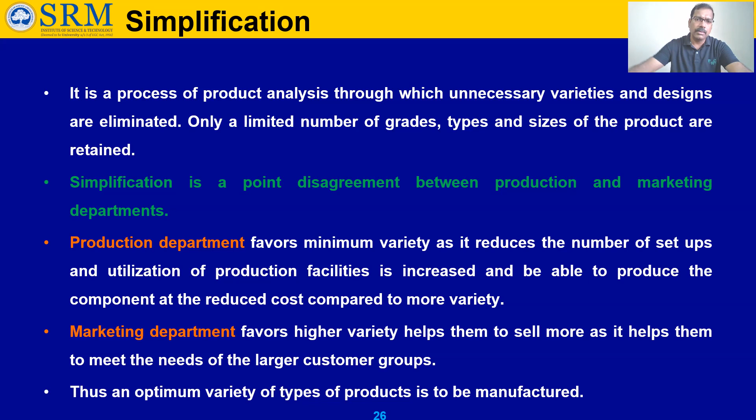The next topic we discussed some advantages of simplification, and what are the disadvantages also there.

Then next topic we discussed about standardization, where we have to standardize what are all the materials we are using, what product we are going to use, what machineries we are going to use, what method we are going to do, what kind of policy or principles we are going to do. We have to standardize to avoid issues in making.

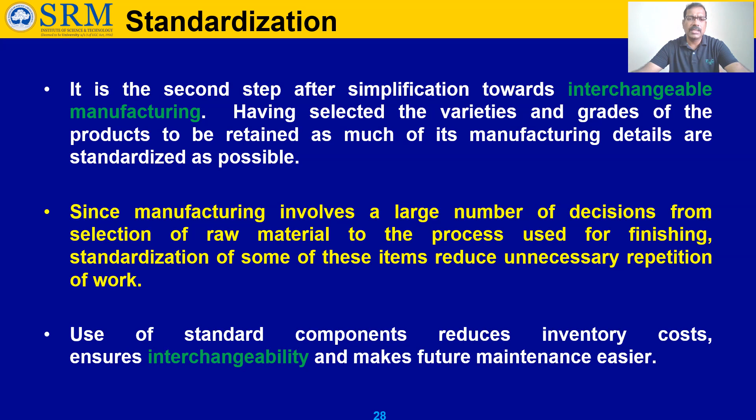Okay, so that is what standardization, where we discussed the interchangeability concept. So what is meant by interchangeability is, if one particular product is being manufactured by multiple operators, by various machines in various locations, all the components should have a desired quality, right?

If it is not in the expected quality, we can't utilize it. Everything cannot be assembled or manufactured at one single place by a single person or single machine, right? So once the number of components getting increased, demand increases, we have to distribute the components to be manufactured through multiple people, multiple places, multiple machines. In the sense, everything should be in desired quality.

For example, somebody, worker number Y, is making one component in one industry, which is going to be assembled with another worker who made component Z in a different location, both should be assembled. If it is not possible to assemble, there is an error in assembly, or if it's not good, then there is a problem, right?

So for that, standardization is important. We have to make that. So attaining is not easy. We have to plan properly so that they can be able to attain it. That is the concept of interchangeability.

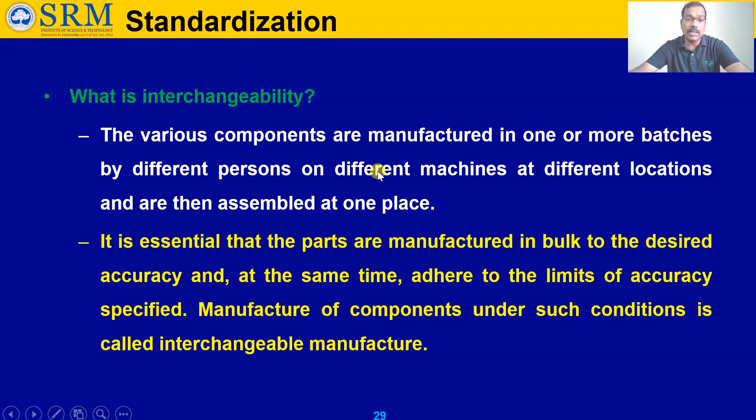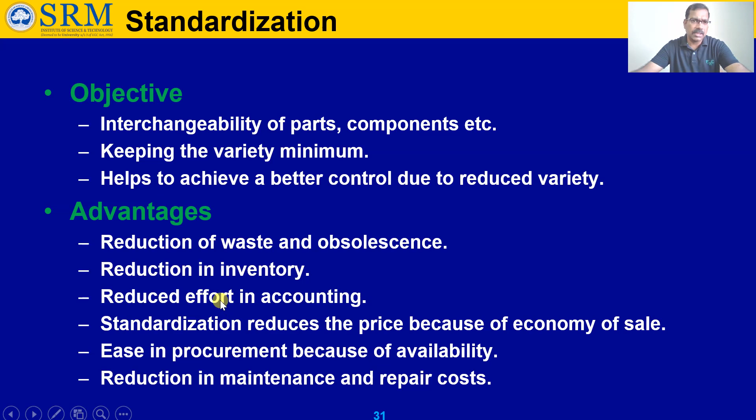Okay, so the objective for standardization we discussed: if we make standard components, we could be able to reduce lots of wastages, we could reduce inventory, and also we could be able to reduce the accounting, and we can reduce the cost of the individual product, so that everything will be more cost saving. So this is what all about standardization.

Then, for standardization, there is a broad category or classification. For example, basic classification like scale and weights, voltages, limits and fits, and surface textures required. So these are all the things.

For example, if they are making some weight, one component should be 200 grams, and it is going to be assembled in one critical component. That weight is very very important. You can't simply add some basic weights. Each and every gram or milligram matters for the final assembly, right? So weight should be maintained. If they say this particular component should be of this much kilogram, gram, or milligram, it should be there. Then only the overall weight will be maintained as per their original plan.

If not, the company is not going to be worked out. Limits and fits, for example, loose fit, interference fit—lots of fits available, right? You might have studied this in computer aided design or drafting principles, where if we want to assemble one component to another, particularly mating components, whether hole-based mating, the surface finish should be proper. Otherwise, limits and fits should be properly maintained so that it is properly assembled and the power or energy is transferred without any faults.

Another thing is dimensional standardization. Simple example: nuts, bolts, screws. Another example is that mostly everybody has a mobile phone, and the mobile phone has a SIM—micro SIM nowadays. You can take the micro SIM and put it in the slots available in your mobile phone, slot one, slot two, and so on. Every company has that. But the size of the SIM should be standardized, then only it will fit into the particular mobile phone. If not, it won't fit and the communication won't happen. So dimensional standardization is very, very important.

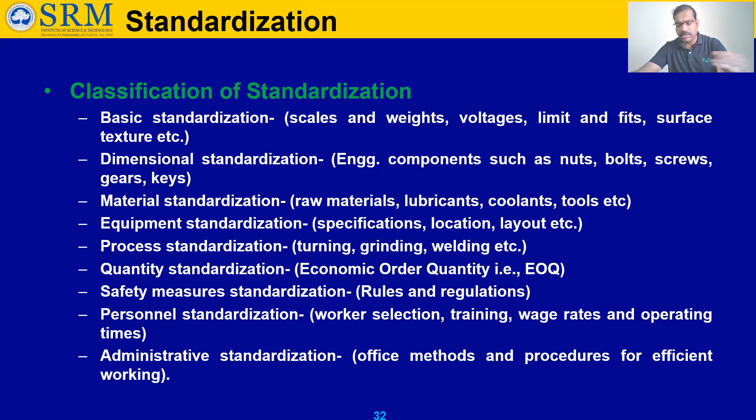Then specialization—as we discussed, we have to make products and processes individualized according to that particular company. We need specialization. For example, product specialization in the sense: instead of having multiple varieties across everything, we have to focus on some limited products, but with multiple variety within them.

Multiple variety in the sense—if you take an automobile vehicle, or again mobile phones, for one particular mobile you will have multiple features or enhancements. That kind of thing you can try. Instead of collecting every option available in the world, it is not possible to make it—well, it's possible, but you'd have to invest lots of money and resources. For that, you have to make product specialization for that particular company, so you focus only on a limited range of similar products.

Then only it is feasible for us, so that kind of specialization of labor. The performance of the worker is very important to attain the required dimension, specification or features we need, so we have to select skilled labor for that.

For example, tool room design in any industry is very critical job. You can't simply take anybody for that. You have to select someone with good knowledge of tool design, then only he can deliver the required product. Fixture design, jig design, tool design is a big art because it impacts manufacturing significantly, so that selection is very important.

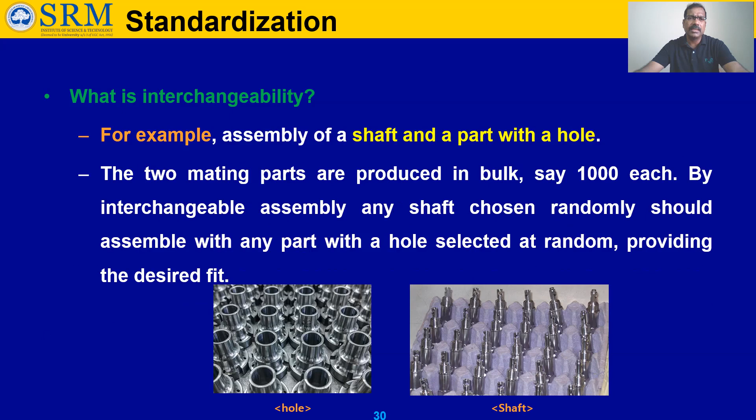So what are the three things we saw? Just to recollect, simplification is the first step, then we do standardization, and the final one is specialization. With these three principles, if we work out, then only the manufacturing industry will run smoothly. Every industry follows that, so you guys need to practice this.

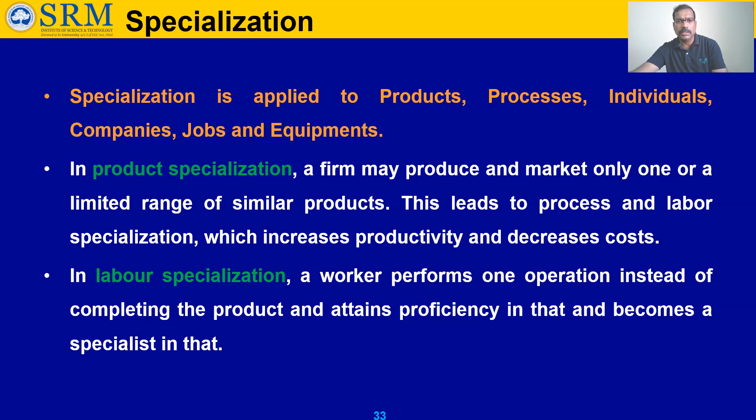Then, another one we discussed is the interchangeability concept, which relates to the standardization principle. For interchangeability, the opposite term or principle is called selective assembly. What is selective assembly? For a selective assembly, components are measured and sorted into groups by dimension prior to the assembly process. This is done for both mating parts.

For example, take a hole and shaft - here there is a rod or shaft, and this component has a hole. In terms of interchangeability, any shaft will go inside this hole - say 1,000 shafts made will go inside this particular hole. That is the concept of interchangeability. But in selective assembly, they make 1,000 of component A and 1,000 of component B, then these components are categorized or sorted based on the measurement of dimensions.

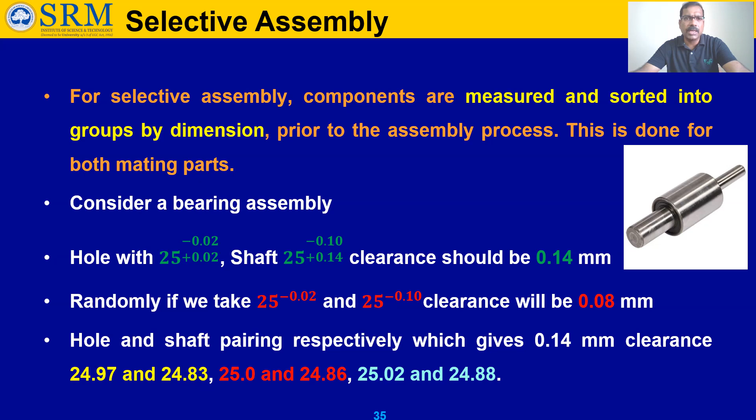So everything is very important. But compared to interchangeability, in selective assembly we have a bit of flexibility. So it depends on the industry and what kind of product they are making, and then they will go for the interchangeability concept or the selective assembly concept.

Then we'll move on to CIM and what components are available. What is CIM? I will discuss now. So CIM is Computer Integrated Manufacturing. Everybody knows about that.

So where did it come from? In the 1970s, a CIM book explained this. The author mentioned that CIM is the integration of total manufacturing enterprises by using integrated systems and data communication, coupled with new managerial philosophies that improve organization and personal efficiency. This is what was given in that particular book in the 1970s.

So what is the concept here? It is mentioned that total manufacturing enterprises have to be integrated, integrating the system using data communication, and also new managerial principles or philosophies will be integrated together to improve the organization and get better efficiency. This is the CIM concept.

The CIM concept comes under the digital manufacturing principle. So what does digital manufacturing mean? It can be defined as an integrated approach to manufacturing that is centered around a computer system. Digital manufacturing is the concept of integrating the approaches carried out in a particular industry through a centralized mode using a particular computer system.

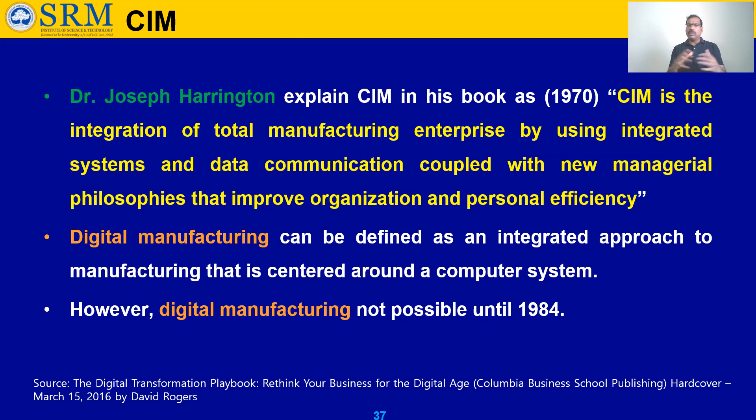Since the CIM definition came in the 1970s itself in the book, did they implement that digital manufacturing concept in 1970? No, this didn't happen during that time. It took lots of time, until 1984, before it reached or was implemented in real industry.

So what happened then? Only in 1984, people like machine tool manufacturers, the Computer and Automated System Association, and the Society of Manufacturing Engineers (SME) — these three groups collectively discussed and came up with a solution for implementing digital manufacturing in the real world.

That's what happened. But when they were implementing CIM, the challenge they faced was connecting the devices, because digital manufacturing is integrating the manufacturing systems available in the industry through the computer. But the big challenge was connecting the multiple different things in the industry. Let me give examples of these instruments.

This is your manufacturing machine, like a prototype of CNC machines, or a big machine that can do machining. Then this is a pick and place robot, which can also do welding operations — whether it does machining like welding, or pick and place. Then here is the quality check, like inspection systems, such as a CMM machine or Faro.

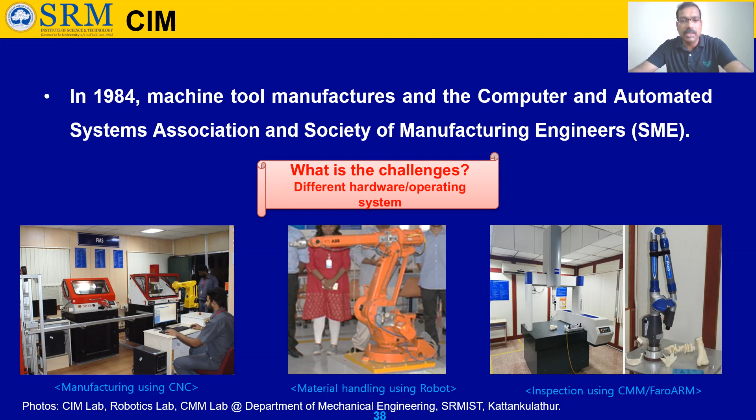So manufacturing machine tool manufacturers, the Computer Automated System Association, and SME sat together and discussed, making improvement policies and standards to make this connectivity happen. This process started in 1984. CIM has three letters: C, I, M. C for computer, M for manufacturing, I for integration.

The general principle is that a computer is a machine that can be instructed to carry out a sequence of arithmetic and logical operations automatically via a computer program. It is a machine which can be instructed to carry out certain tasks in a sequential manner using arithmetic or logical operations automatically.

Through programming we can define how to do the operation. For example, in an NC or CNC machine, using G codes and M codes as arithmetical and logical operators, we can write the coding and sequentially instruct the CNC machine to perform the particular manufacturing operation.

The programming will be written through the computer and fed to the particular CNC machine. So this is what C stands for in CIM.

Next is manufacturing, M. It is the process of converting raw materials into useful, tangible products. We discussed the difference between manufacturing and production earlier: both tangible and intangible outputs come under production, while only tangible comes under manufacturing. Nowadays people also use manufacturing to include both tangible and intangible outputs, so there are two different definitions.

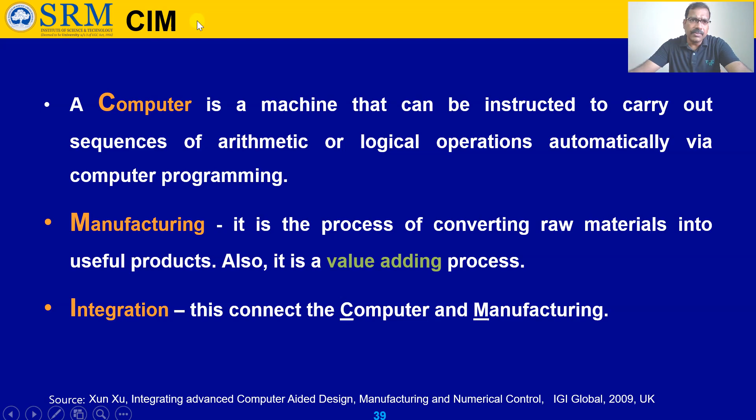So integration came about in digital manufacturing, connecting the computer and the manufacturing process. This is the process of integrating.

So what is the definition? These definitions I took from an M. P. Groover book. CIM is the manufacturing approach of using computers to control the entire production process. Computers here are not only for programming, they also do the integration to control the entire production process. This integration allows individual processes to exchange information with each other and initiate action.

For example, take multiple machines or an individual CNC machine doing a grinding or turning operation. Once it attains the desired dimension, the depth of cut or feed will stop, the tool will go back to its position, the spindle will stop rotating, and then the door will automatically open.

The pick and place robot will go inside the CNC machining center, take the component from the spindle, and put it in the tray. Then the conveyor will move the component from one machine to another, where the robot will take that component and feed it into the spindle of the next CNC machine for further operation, like drilling. So how is all this connected?

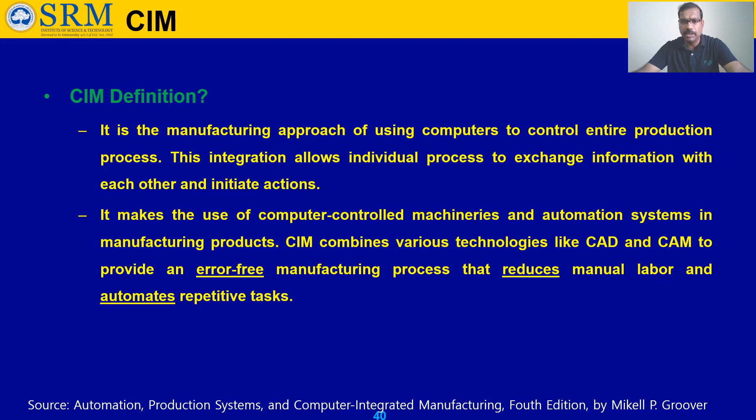Then in a CIM system, the functional areas that come under CIM are designing, analyzing, planning, purchasing, cost accounting, inventory control, and distribution, which are linked through the computer to the factory floor functions, such as material handling and management, providing direct control and monitoring of all the operations. So these are all the functional areas.

So what are all the functional areas? Like I mentioned, designing, analysis - all this comes under CIM. So every detail related to the manufacturing or product comes under computer integrated manufacturing. So all these functional areas are linked.

So it is connected through computer with the factory floor function. What are the factory floor functions? Material handling system, management system, or control and monitoring of all operations is one set. Another set is designing, analyzing, planning, purchasing, cost accounting, inventory control, and distribution. This functional area group will be communicated to the material handling system and others through the computer.

That is what all about CIM. So what are the data flows happening? As I said, communication is happening through computers, connecting this functional area to other parts.

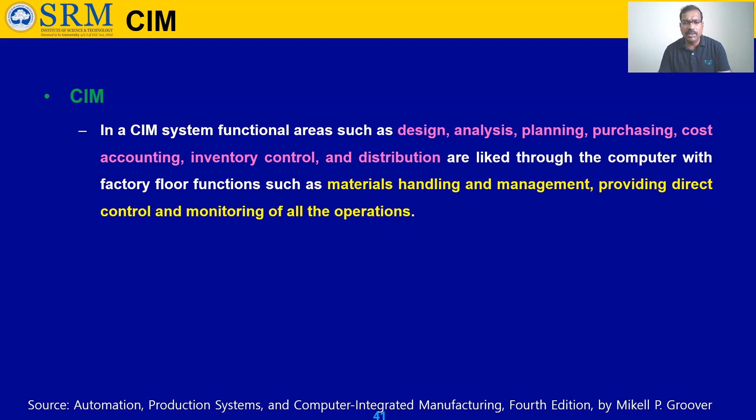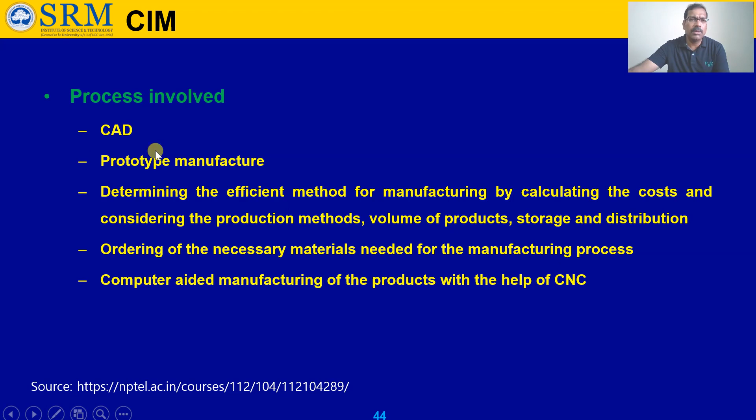So that is also there in the CIM wheel. The CIM wheel integrates everything through the integrated system architecture in the common area. So all this, like the design, comes under drawing or designing. The data flow I explained here, it is coming in manufacturing or logistics and customer or finance - everything will be connected.

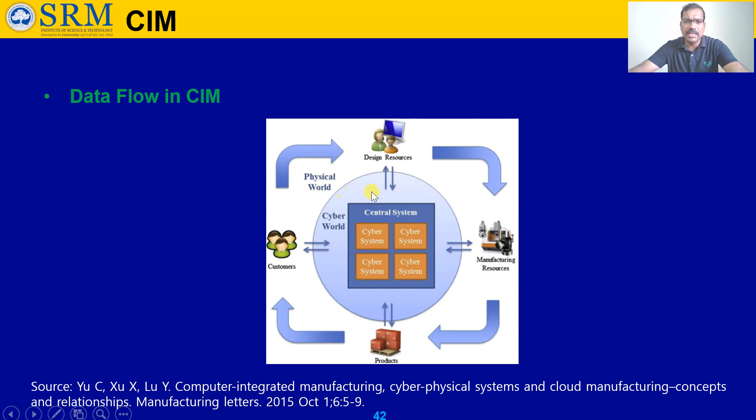With this, the CIM wheel helps you understand all the processes available in CIM, starting from the design till the dispatch and then maintaining all the logs. Not only ending once we send all the components from our assembly, our work is not done. We have to constantly track the customer, whether they have any opinion or whether we have to do any improvement, or whether they are giving any complaints. We have to track it down.

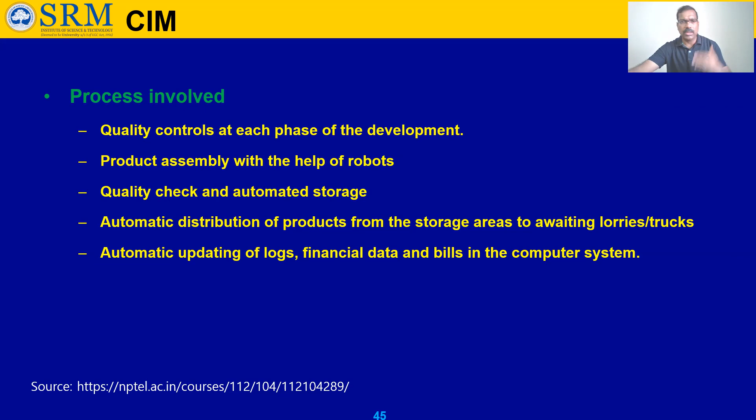This is also one of the processes involved in CIM. Then what are all the advantages of CIM? It is basically error reduction. So due to error reduction, what will naturally happen is the productivity will improve. What is meant by productivity? With minimum resources, attaining maximum output.

That is the ratio, it's a kind of efficiency we can say. We will be investing minimum resources or investment but attaining a huge output - that is what your productivity is. So if we do minimum investment but there is error in that, can we get the maximum output? Not possible. So error reduction is possible if we do proper planning or controlling everything stage by stage, phase by phase. That's why productivity will be improved and error also will be reduced through the CIM principle.

And reducing man intervention - mostly we automate the system through computers and machineries. So reducing the man intervention and the number of process steps will also be reduced. Instead of doing multiple operations for a single feature, we can combine many operations into one. Simple example: selecting a tool like a drilling and reaming tool combination, or combined punches - if we do all together, then we can reduce.

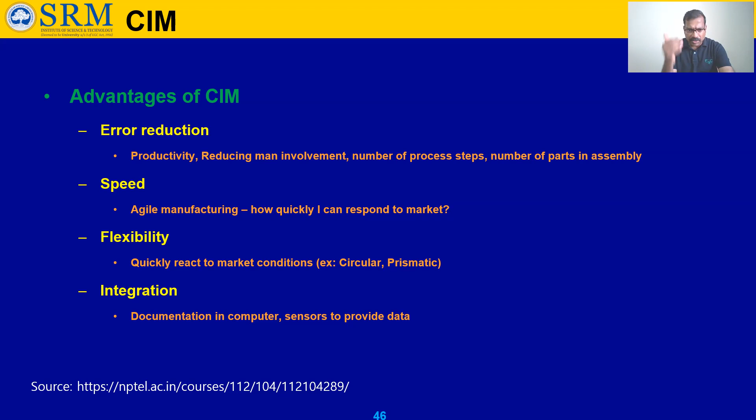Similarly, we need speed to produce with error reduction, and everything will be integrated through documentation in the computer, using sensors to monitor - for example, when a CNC machine is running, the spindle speed and cutting speed are measured through sensors, and we get feedback on whether the machining is done properly and efficiently. We have to track it back. This is the advantages of CIM.

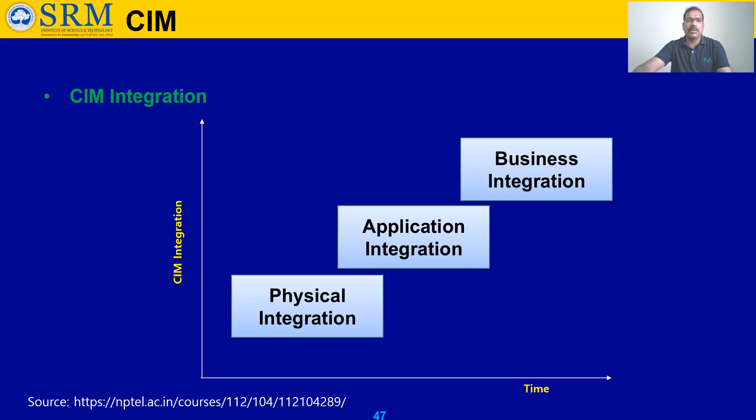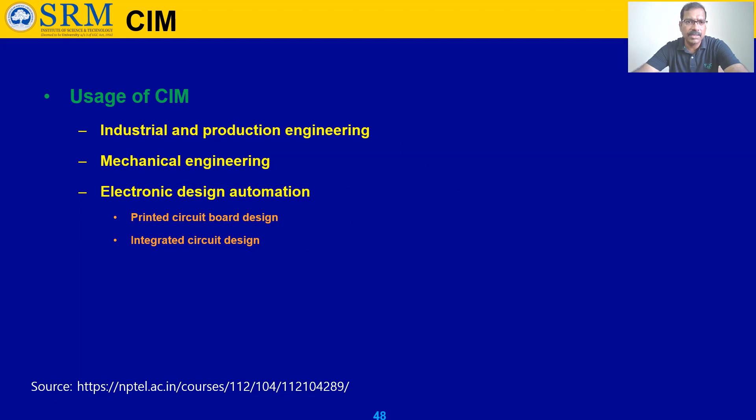What are the usages of CIM? Industrial and production engineering people use CIM, as do mechanical engineering and electronics people, who use the same concept for PCB design and IC design - integrated circuit design and printed circuit board design. This is the basic usage. And what are the challenges available?

When you go for industry or machineries, various controllers are there, and they are not ready to come forward and integrate together because each has its own integrity or security, so they are not integrating well. What we can do is, when connecting the machine, RS-232 cables, or that category of cables, are used to connect them. So integrating components with different suppliers is the biggest challenge in implementing the CIM concept.

Then data integrity - how we are going to keep the integrity or safety of the data - is another big challenge. It is also one of the challenges in our Industry 4.0 concept or digital manufacturing concept.

Then process control - how we are going to control the sequence in which the component moves from one place to another, whether it is ready. Here, a designing center is there, information is communicated to the controller room, then prototyping is done, then it goes to the production line, where lots of machines are available with conveyor belts doing the process.

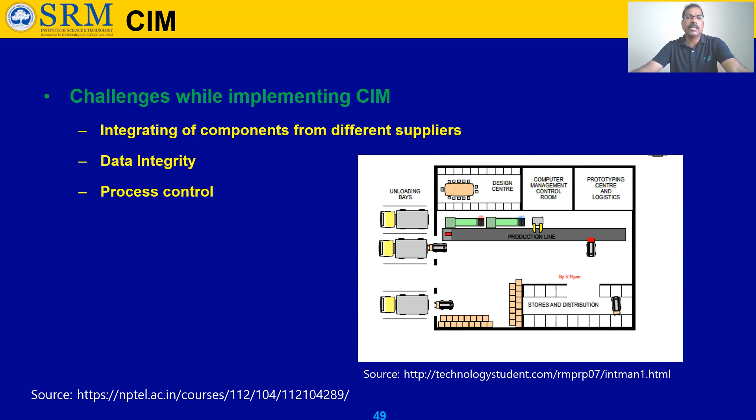So these are all the challenges: integrating components from different suppliers is one challenge, data integrity is another challenge, and process control is one more challenge.

What are the subsystems that come under the CIM umbrella? CAD, computer aided design, CAM, computer aided manufacturing, and FMS, flexible manufacturing system, also come under the subsystems for CIM.

Then computer aided engineering, where you can do analysis, then quality control - computer aided quality control and assessment, that's what I added as A - and production planning and control, PPC, and ERP, enterprise resource planning. All these are considered ERP, mainly focused on finance, but this also comes under the CIM system as a subsystem.

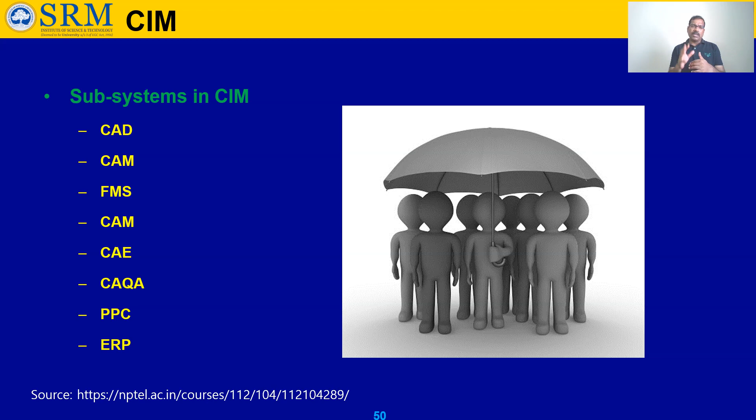Now, what are the devices used, as we saw in previous slides also? You will have CNC machines, material handling machines, DNC machines, PLCs - all these come under sensors - robots for material handling, and computers to process the data or interface it.

Software is used to control the CNC machines, or for modeling purposes, or for financing and ERP planning they have software. And controllers, networking and interfacing are very important - data communication through the network and interfacing also. So these are all the devices and equipment.

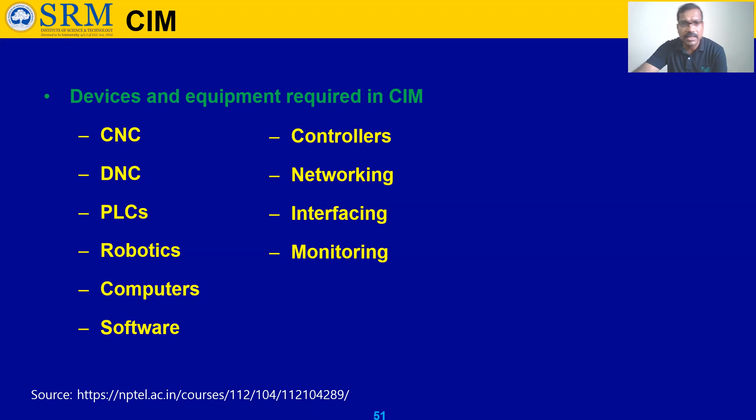DNC is direct numerical control, the next level from CNC. NC is the basic level, next is the CNC level, next is the DNC level, where multiple CNC machines are controlled through a centralized server called the DNC. We'll discuss NC, CNC and DNC later in the lecture. So these are all the devices and equipment required for CIM.

Then what are the technologies? FMS, flexible manufacturing system, is one. Automatic storage and retrieval system is another technology. AGV, automated guided vehicle, is another. Robotics, like pick and place robots, conveyors, come under technology, and storage or conveyor systems are one of the technologies. And whatever software they are using also comes under technology. So these are all the technologies available for CIM.

With this, I'll be ending this lecture. In this lecture, we discussed the 3S principle - simplification, standardization, and specialization - then started with the CIM introduction and definition, where it came from, what components are available, what processes are involved, what the CIM wheel is, what devices are required for CIM, and what challenges and technologies are used under CIM.